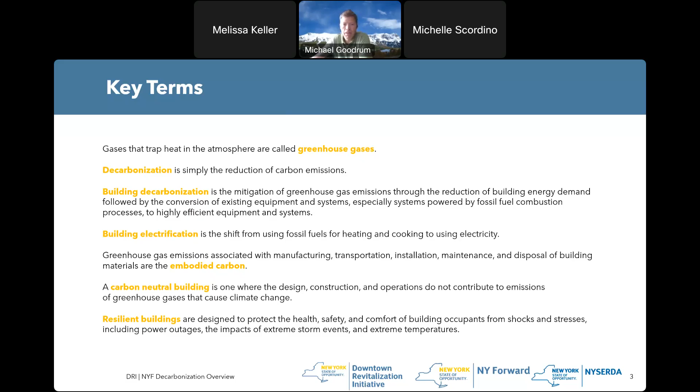As far as New York specifically, New York has the Climate Leadership and Community Protection Act, or the Climate Act, which sets out a goal to reduce carbon emissions by 85% by 2050.

One of the goals is for 70% of the state's electricity to be generated by renewable energy by 2030, which is coming quickly, and then 0% fossil fuel generation by 2040.

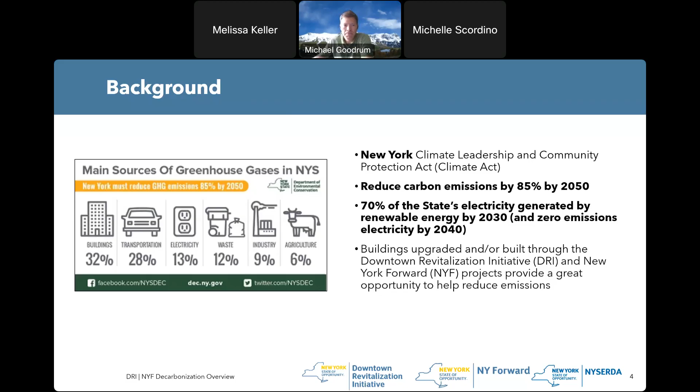When we talk about building decarbonization, one of the benefits many folks consider is the economics - looking at utility cost savings and utility costs. We've outlined two components of utility costs and savings associated with building decarbonization. The first is energy efficiency, where you're improving the efficiency of systems, basically getting the same amount of light, heating, or cooling for less energy.

By reducing the energy use for those things, you end up reducing your associated energy costs because you're using less energy. Building electrification, where you're moving from fossil fuel to electric sources, will reduce or even eliminate fossil fuel utility costs, but it also increases electricity costs, and that may or may not result in savings. A lot depends upon what the utility costs for fossil fuels versus electricity are, and those are changing over time. At any given time you have to evaluate, but just because you implement a building electrification measure doesn't necessarily mean you are going to lower your utility bills. Some of that depends on the associated costs with the different utilities.

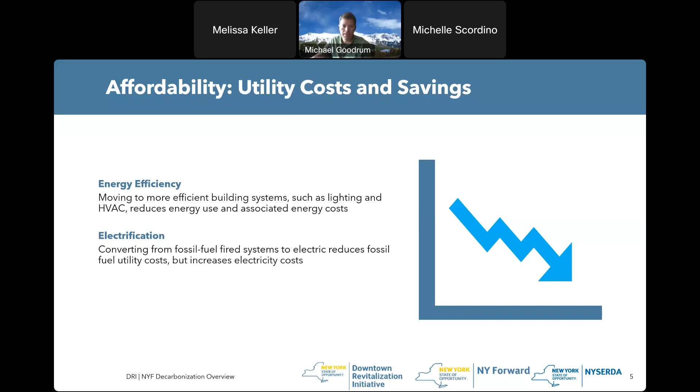Other benefits related to decarbonization, besides potential cost savings, include things like health benefits, with electric systems that don't have emissions from combustion exhausted into the building space. We talked about resiliency before, and strategies we'll talk about today can help your buildings better weather extreme events and remain comfortable and in operation. There are even things like improved comfort for occupants, with increased airflow or movement, or in places that may have only had heating previously, installation of heat pumps can give some cooling capacity for those days where it gets a bit uncomfortable inside. So there's a variety of benefits to building decarbonization as we start to talk about the different strategies here.

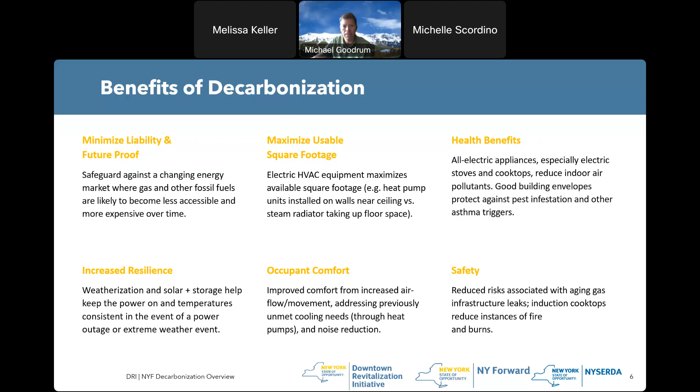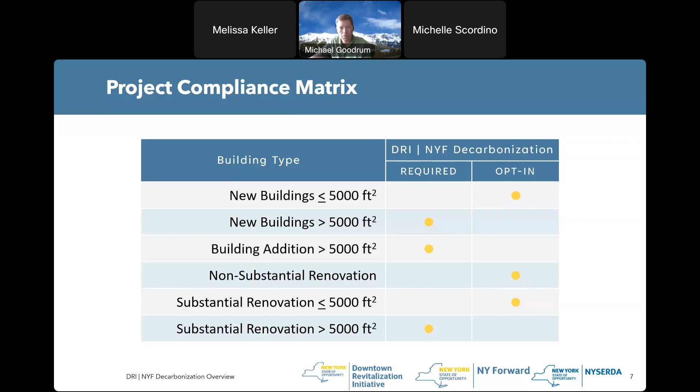If you are required to meet it, we have three compliance paths for decarbonization that projects can select from. The first is complying with the New York Stretch Energy Code, which is about 10% more efficient than the state's base energy code. You can meet that one of two ways: the first being following prescriptive improvements, meaning for the building envelope, it'll specify certain R-values of insulation you need to meet, things like that. Or you can pursue a performance-based path where you demonstrate whole building performance with an energy model, showing your energy use per square foot is below a number specified in the code for your building type.

A second option is an Energy Star path, which makes use of Energy Star's Target Finder software, associated with their Portfolio Manager program. In this case, you would achieve an estimated score of 90 or better. With Target Finder, you enter some basic building information and project out a year's worth of your building's energy use, and it will generate the expected score for you. I know there's been news about the Energy Star program. As far as we know, it still exists, so this is still an available compliance path. If something changes in the future, we'll probably make some adjustments in the program, but for now, it remains a viable option.

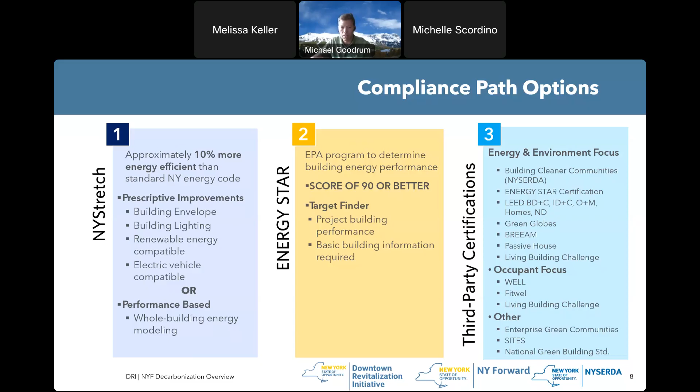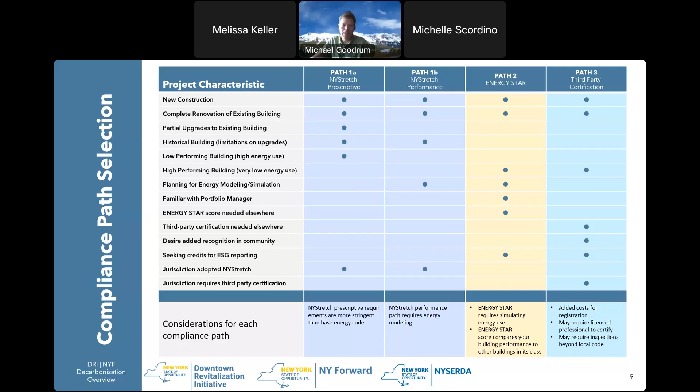If you were planning to do a whole building energy model or something, the New York Stretch Performance Path or Energy Star could be good. And like we said, if you're already thinking of doing, say, LEED, that could be a reason to do the third party. So each of them has pros and cons, but we designed the program so that there's some flexibility for projects to find the path that best suits their project and meets their needs. And now I will turn it over to Michelle, and she will start to walk us through some of the ways we pursue building decarbonization in our projects.

Thanks, Michael. As Michael said, we're discussing decarbonization, especially in the context of DRI New York Forward, with the majority of projects being buildings. So we'll focus primarily on building systems, but we also wanted to mention that transportation is another key component of decarbonization, and there are some projects that touch upon that as well. So we'll look at new buildings, existing buildings, and also mention transportation.

So how do we get to decarbonization is the first focus of this part of the presentation. For new buildings, the main focus is integrating more efficient designs than required by the New York Building Code, incorporating electrification solutions, improving the building envelopes, which we'll discuss in greater detail, and integrating clean energy sources, whether on-site or off-site. For existing buildings, we'll discuss retrofits for existing systems, building envelope upgrades, which may look different than for new buildings, and also clean energy sources.

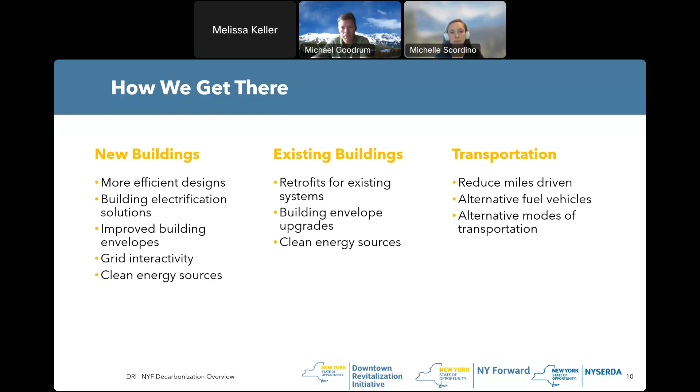So again, focusing on buildings, new buildings versus existing buildings. New buildings start from the conception of a project, integrating decarbonization into all aspects of a design. So integrating passive lighting, heating, and cooling. We can look at electric systems for both heating and cooking appliances as well. Integrating high performance building envelopes, lowering the load of the building, and using more efficient systems than required by the base energy code in New York.

For existing buildings, a big concern is constructability. Given that you've got a structure of a building, you have to think about backfitting into existing systems. Envelope improvements may be more challenging for existing buildings than for new buildings, but you can still achieve pretty high building envelope performance through renovations. Focusing also on minimizing disruption to occupants in occupied or partially occupied buildings. Building contingencies into the construction process, knowing that things come up with an existing building, which may require different workarounds than anticipated at the beginning of a project.

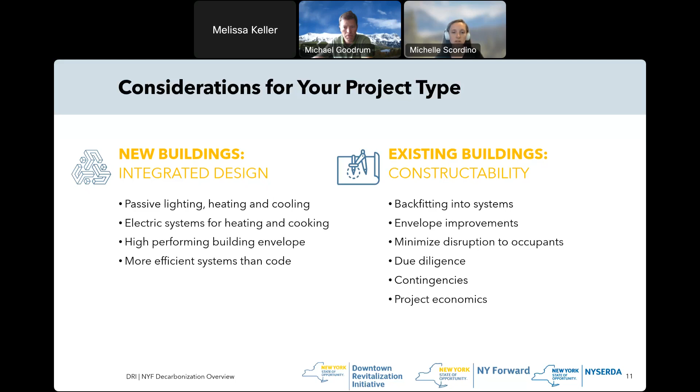Some steps for decarbonizing a building include, first, understanding your current or projected energy consumption. This is very important so that you have a good handle on how an existing building is using energy, or for a new building, how you anticipate it to use energy. Once you have a good understanding of how the building will use or currently uses energy, you can then look at reducing loads and maximizing energy efficiency. And then thirdly, integrating building electrification strategies, either through equipment or

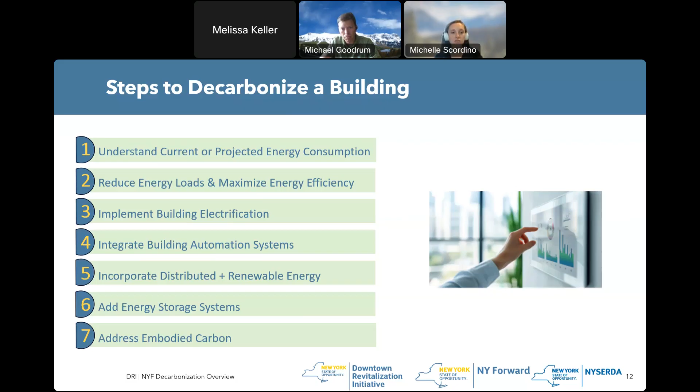other appliances. Fourth, integrating building automation systems to further maximize the efficiency of your building. Fifth, incorporating distributed and renewable energy resources, whether on or off site. Sixth, adding energy storage systems, which also increases the resiliency of the building. And then finally, addressing embodied carbon.

Looking here at some attributes of a decarbonized building. Decarbonized buildings, they maximize energy efficiency. They work, you know, just holistically, kind of understanding your building and how it's using energy. Decarbonized buildings also favor electric end uses over fossil fuel combustion to lower the emissions associated directly with the building itself.

You can also produce or procure your own zero emission electricity. So through solar panels, for example, or also procuring your energy from offsite, such as community solar systems or also community wind turbines. Fourth, also, decarbonized buildings are designed with flexible loads and storage as well that can respond to grid conditions. So for example, if you have a solar system that's also working with a battery system and the power goes out, you have that backup energy to continue meeting all the demands of your building.

Fifth, thinking of resiliency. So again, what I just mentioned is a resilient measure. So if you have your own energy that your building's producing and your building's all electric and you have a battery system, when power goes out, if you've charged that battery, then your building is set. So that's an example of a resilient building. And then finally, designing with attention to embodied carbon, as well as low global warming potential refrigerants as well.

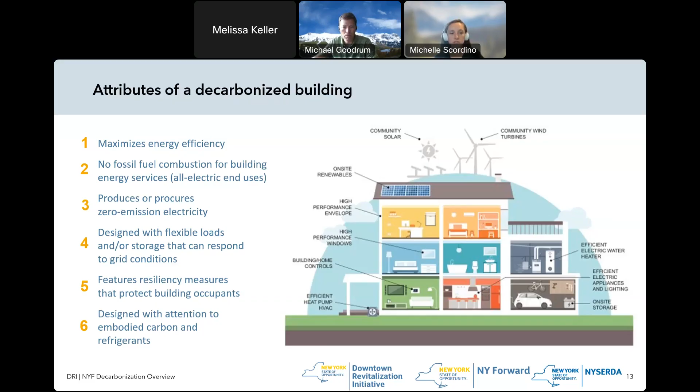So the next section here, we're going to take a deeper dive into some strategies for decarbonization, and we'll hit kind of 4 main categories. The first being load reduction strategy. So we'll go through some high performance building envelopes, LED lighting with occupancy controls, energy recovery ventilation, which can optimize your heating and cooling demand, as well as smart electric appliances.

Next, we'll move to building electrification, which will include making sure that a building has the sufficient electrical capacity and service to meet the building demands. We'll talk through cold climate air and ground source heat pumps for both space heating and cooling, as well as heat pump water heaters with storage tanks and demand flexible controls, electric induction cooktops and heat pump dryers.

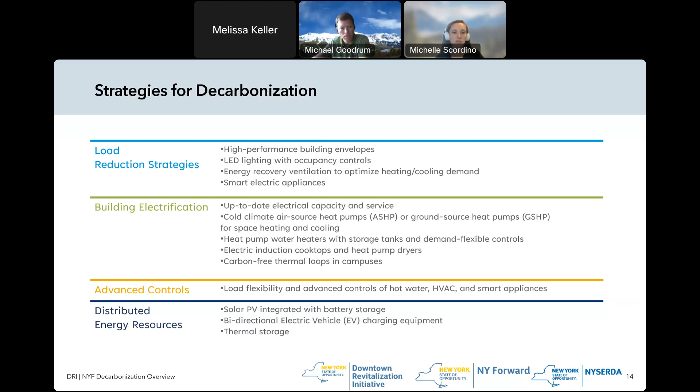And then moving on to advanced controls, we'll also discuss some load flexibility and advanced controls of hot water, HVAC, and other smart appliances. And finally, conclude the section with distributed energy resources such as solar panels, bidirectional EV charging, and thermal storage.

So first here, to kind of define what load reduction means, we're focusing here on 2 building load reduction areas. So electric load, which is the amount of electricity required to operate any electric appliances or HVAC lighting in the building, as well as plug loads, which are things that you plug into outlets. As well as the second kind of load reduction area being heating and cooling load, which is the amount of heating and cooling required to maintain spaces comfortably for occupants and equipment.

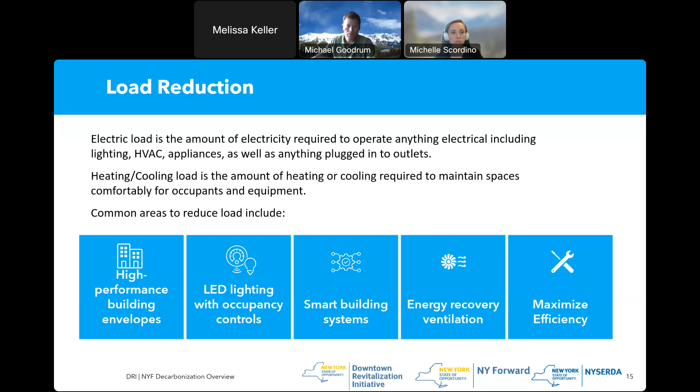So within those kind of 2 areas of load reduction, we'll look at high performance building envelopes, LED lighting with occupancy controls, smart building systems, energy recovery ventilation, and then maximizing efficiency with your systems. So the first area of load reduction, we'll look at high performance building envelopes. Now, I've mentioned building envelope a number of times already.

And so to define that, I just want to say that the building envelope is really any component in your building that's going between conditioned and unconditioned spaces. So typically this is going to be your exterior walls and windows and doors, which would include also the insulation, your framing, the drywall, exterior surfaces of your building as well.

I also want to call attention specifically for New York that in heating dominated climates, high performance building envelopes significantly reduce the energy loads on your building. So there, especially for existing buildings, making envelope upgrades is very important. There's a lot of leaky buildings out there and a lot of wasted energy just because of heat loss in and out of buildings. And so focusing on high performance building envelopes is really key to driving down the loads of your building.

Also, with one of the main paths of decarbonization compliance being the New York Stretch Code, I wanted to note that New York Stretch does require improved efficiencies compared to the base energy code for building envelope performance factors. For example, the windows and insulation as well as thermal bridging are more stringent in the New York Stretch Code than is required by the base energy code.

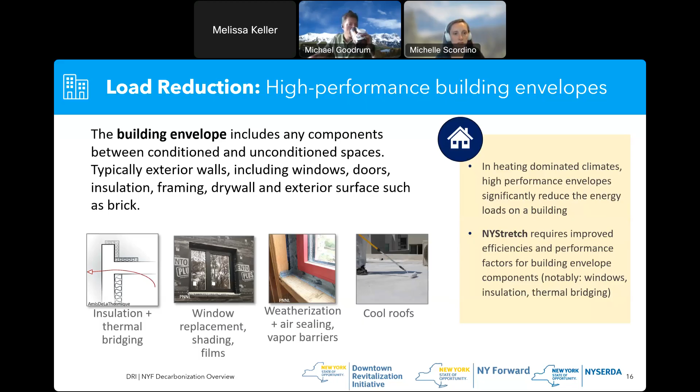The next load reduction strategy is LED lighting with occupancy controls. So lighting is something obviously all buildings need, and LED fixtures have made driving down lighting loads much more possible than in the past. But then also pairing LED fixtures with occupancy sensors to turn lights off and on, either from sensor controls or through timers, can really drive down the lighting loads on your building. In addition, using natural lighting such as skylights and strategically placing windows to bring in more natural light can also bring down some of your lighting loads in a building.

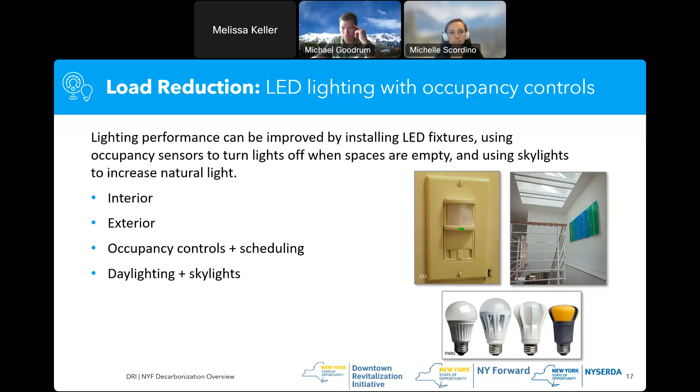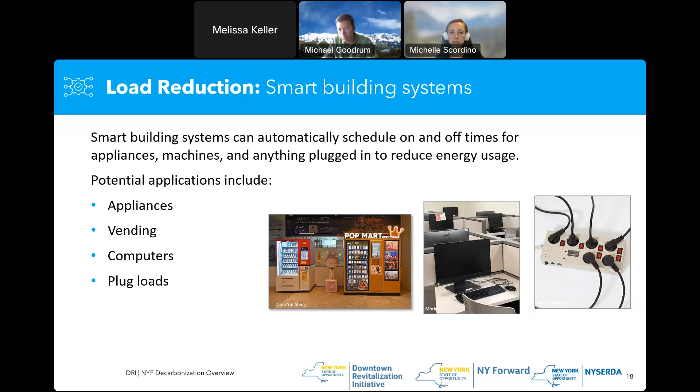The next one, ventilation strategy. So we have two ventilation strategies we'll be discussing here. The first one is ventilation air, so the amount of air that you're bringing in and out of the building. By reducing the amount of air that you're bringing in to what is actually necessary for the building, you can really limit what your HVAC equipment has to condition.

So some strategies for this can be using natural ventilation, demand control ventilation, which is based on sensors determining how much is actually needed in the building, and then also using circulating fans, which move around the air so the air in a building isn't stagnant, but it's not necessarily bringing in external air at all times. And then additionally, reducing losses through the ductwork of your ventilation. So insulating ductwork and piping, and also air sealing ductwork makes a big difference in regards to energy loss for ventilation air.

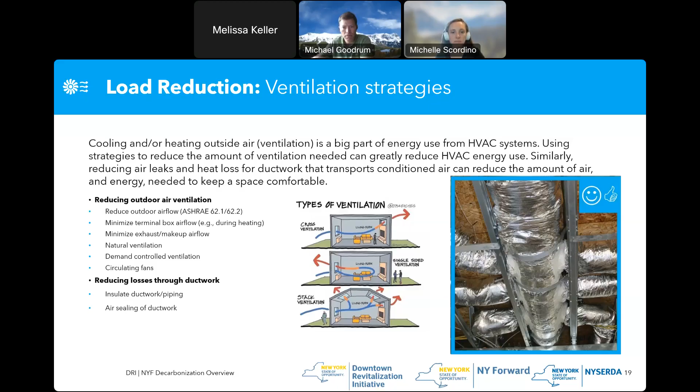And I believe we've got this one and one more. So the next, also regarding ventilation, is using energy recovery ventilation. Energy recovery ventilators are an added piece to your HVAC equipment where a heat exchanger preconditions your incoming outdoor air with the exhaust air from your building. So in a heating season, your hot air is going out as you're bringing cold air in, those two air streams pass, and you're able to preheat that air coming into your building so that your HVAC equipment itself doesn't have to do as much to get your supply air temperature to the required temperature for distributing to the building for heating.

This can be, as I said, integrated in your ducted HVAC system, as well as you can incorporate various configurations, such as in your domestic hot water systems, using hot water to also preheat your incoming air, for example. Yeah, particularly important for New York Stretch.

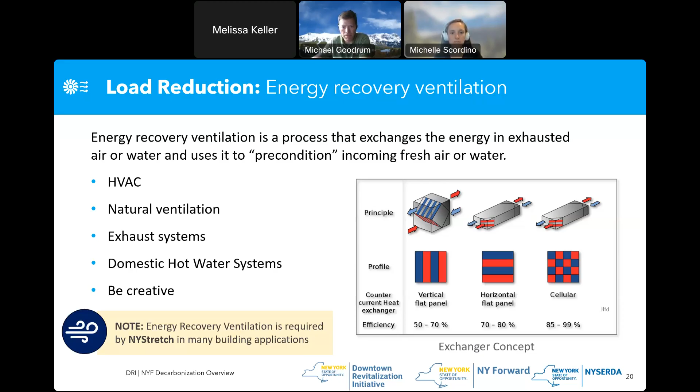Oh, okay. Just wanted to note that energy recovery ventilation is required by New York Stretch in many of the building applications. So not all, but something I want to particularly bring to your attention as your projects are designing their HVAC systems. And then you can move to the next one.

In addition to ventilation loads, we've also got domestic hot water load reductions. Domestic hot water can be directly reduced through lowering supply temperatures, or indirectly by reducing the losses and loads of the equipment. So we recommend lowering domestic hot water supply temperatures for systems that might be exceeding what is actually necessary for distribution. So aiming at the lower end of what's required, which is typically 120 to 130, and using the lower end of 120.

Also using high efficiency faucets and shower heads to limit the amount of water that's just going down the drain, as well as domestic hot water heat recovery. So similar to energy recovery ventilation, you can also use heat recovery for your drain water. As your hot drain water is going out, you can precondition your cold incoming water through the heat from what's outgoing. And then similarly to ventilation, reducing losses in your piping through insulating your water heater tanks, as well as the domestic hot water piping.

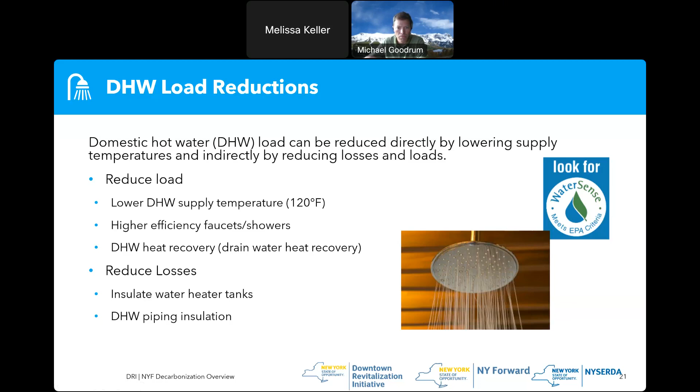I think we lost Michelle.

So I'll pick up the last piece here in the load reductions, looking at maximizing efficiency, especially of your HVAC systems, which are two different forms of commissioning strategies.

There's retro commissioning and recommissioning. Retro commissioning is when you had a system that was installed but never commissioned. The commissioning process involves going through and testing it all, making sure it's operating the way it was designed to—things turning on or off, or adjusting to certain levels, when they're supposed to. If that's never been done, your building may not be operating as efficiently as it can. By doing a retro commissioning process, you can take the systems and make sure they are working the way they were originally designed, which can bring a lot of efficiency improvements.

The other is recommissioning, which is for a system that was once commissioned, but maybe it's been 10 or 15 years and nobody has been paying as close attention to it since, so it's not operating as well as it had been when it was new. You can go through and essentially repeat the commissioning process, restoring things to working the way they were designed and improving the efficiency of the systems that way.

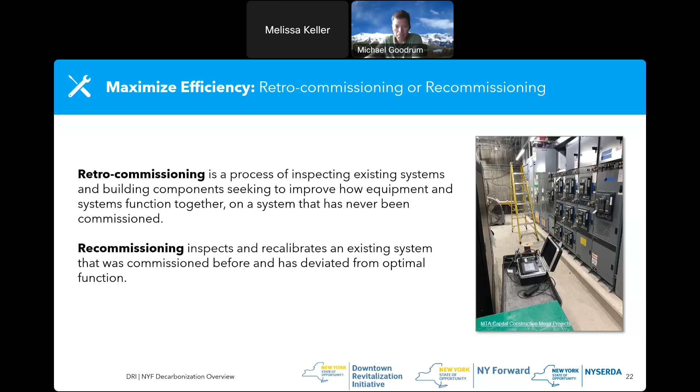After load reductions, the next step, as you saw in the slide Michelle covered, is moving into building electrification. We defined that before as moving away from fossil fuel fired systems to electric powered systems, especially for heating and cooling. We'll start by talking about electrical capacity, which isn't really a specific strategy for heating and cooling, but is an important foundation for the other strategies. Then we'll look at heat pumps for space heating and cooling, as well as water heating, and last, electric appliances.

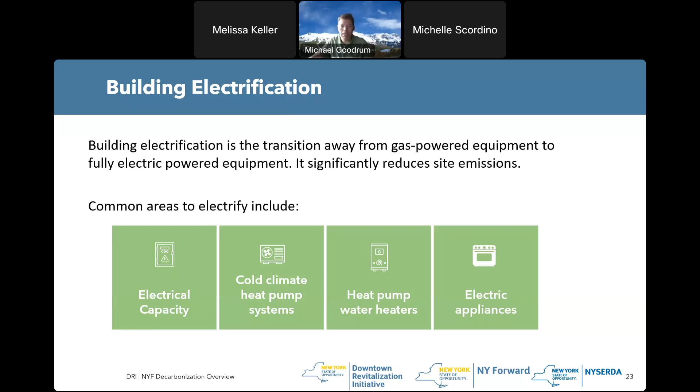So before talking about electrification, an important piece of it is electrical capacity. This is primarily a concern for existing buildings where you're doing a renovation—obviously in new construction you can build for the capacity you need. But for older buildings, especially something like a historical building, their old electrical infrastructure was designed before a lot of the electric loads we have now, even down to things like computers and television screens everywhere.

So the capacity may not be sufficient for switching from, say, a fossil fuel fired HVAC system to an electric heat pump based system. Going through and getting your building to what we might call electric ready—noted here, there's no savings from this. We talked about utility cost savings before, but getting to an electric ready standpoint, unfortunately, is just a cost. It's not necessarily going to save you any energy, but it will set you up to implement some of these other strategies.

That can include doing an electric demand analysis—basically looking at all your electric loads, how much they use, and how that compares with your capacity—and then, if you need to, pursuing a utility service upgrade. We're talking about this now at the front because if you do need a utility service upgrade, that can be a pretty lengthy process, so you'd want to get started on that study now, making sure you have the capacity or pursuing other upgrades so they don't slow you down from implementing other strategies.

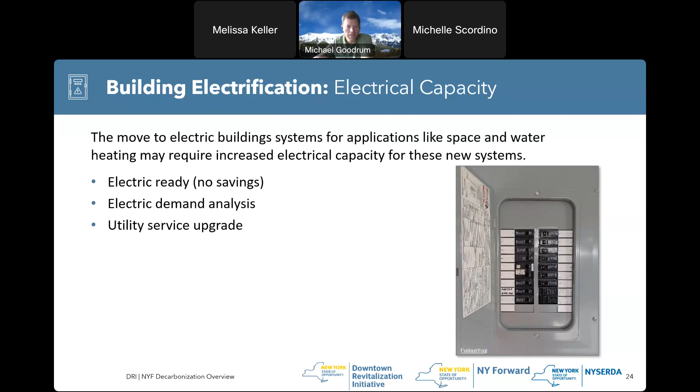If you're looking at replacing that with something like an air to water heat pump, or a heat pump based system, most heat pump based systems produce hot water at a lower temperature—a lot of them are in the 120 to 130 Fahrenheit range.

Which would be considerably less than, like the 180 of an existing system. So making sure that you can still heat the building properly if you're going to make that switch. Some strategies for making it work can include making adjustments to the system so it can operate at lower temperatures.

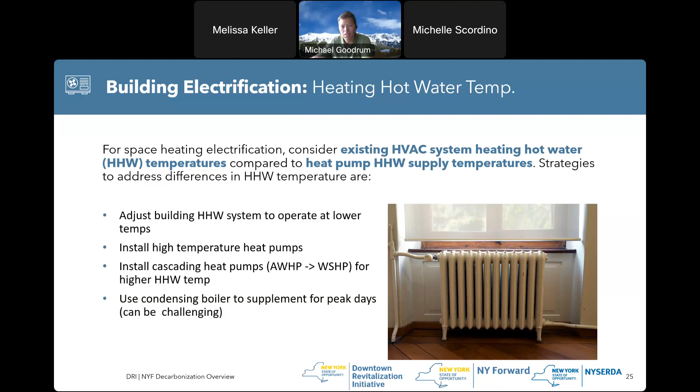So addressing the hot water temperature of the system is another key piece. Once you've looked at electrical capacity and the hot water temperature capacity for your system, then you can move into the heat pump technologies for electrification.

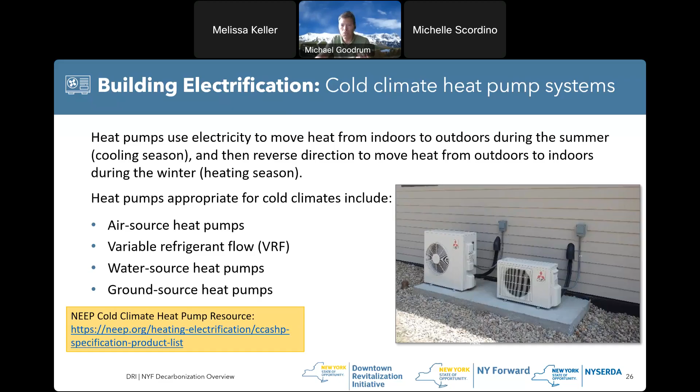If you think about the air conditioning unit with the fan outside that's running, you basically have something like that running here with the heat pump. So you've got some noise when it's running. The other thing is that they need a lot more room for ventilation. So either you need a bigger space for the water heater to be in, or you need some form of ventilation, whether it's piping to the outside or vents cut in the room or something like that. Each manufacturer kind of has its own specifications for that, but those are two things to think about.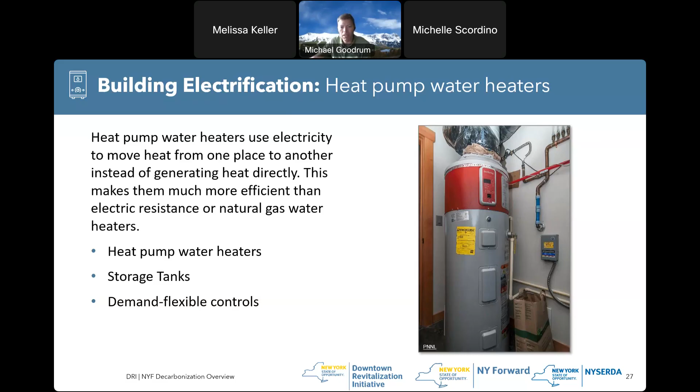The last item is electric appliances. These are probably most common in multifamily or residential type settings, things like induction cooktops. I know there are electric resistance cooktops, the old ones with the coils - anyone that's ever used them knows they're not awesome.

Induction cooktops are way better and also way more efficient, so they can be a good option. And they do also make heat pump dryers. It's similar to the other heat pump technology in the way it works, and they're a very efficient and low operational cost form of clothes drying.

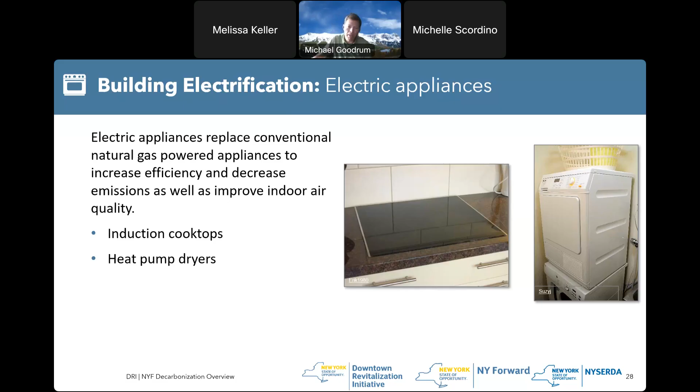After the electrification strategies, then we're looking at advanced controls, and really layering these in to help make sure that things are running optimally. That can include monitoring-based commissioning, and then load flexibility and grid interactive controls.

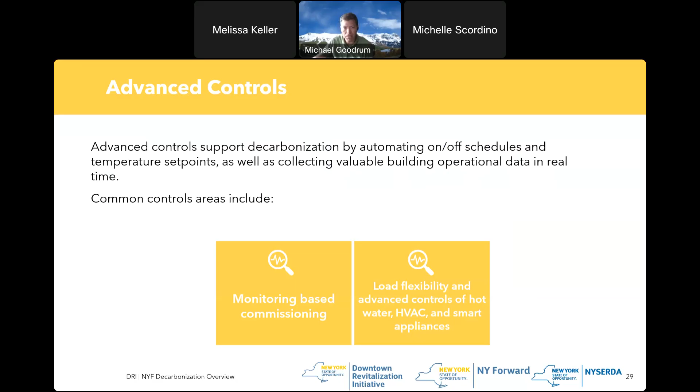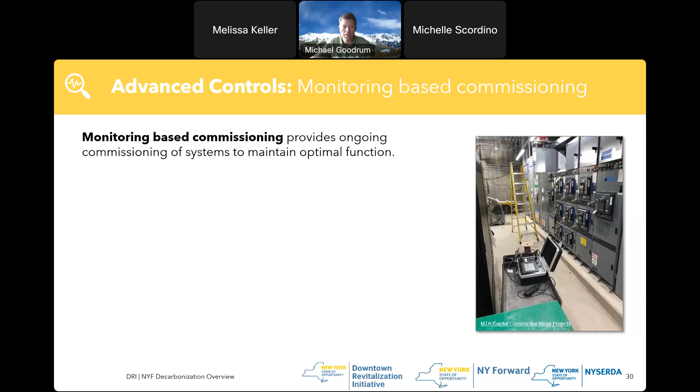Monitoring-based commissioning - we talked about the other commissionings before. This is just an ongoing commissioning, so you're basically doing a regular tune-up of your building systems over the life of the building to make sure it keeps working the way it's supposed to, instead of having to do a tune-up every 10 years. And then load flexibility or other advanced controls let you program energy saving strategies into them.

So like scheduling and optimizing when systems turn on and off to heat or cool, or resetting temperatures - so when people aren't in the building in the summertime, it doesn't need to be 70. Maybe you can let it be 80 degrees and then cool it back down in the morning. Or same with pressure, that can affect how much fan energy you're using. And so adjusting those things helps minimize the energy use of the system.

Michelle talked earlier about some of the ventilation strategies, and you can use CO or CO2 sensors to control how much ventilation you need. So things like a gym that doesn't always have people in it - you don't need to bring in a whole bunch of outside air if there's nobody there.

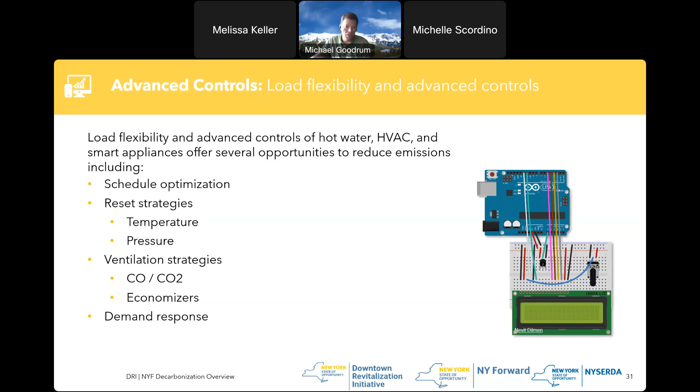And then demand response, the last one - sort of what we talked about with the water heater, where you can make adjustments for times when energy costs might be higher. Say setting the temperature to 72 instead of 70 at times when energy costs are higher, so you run your system a little bit less than you would have otherwise. Those can help layer on some additional efficiency and optimize your systems.

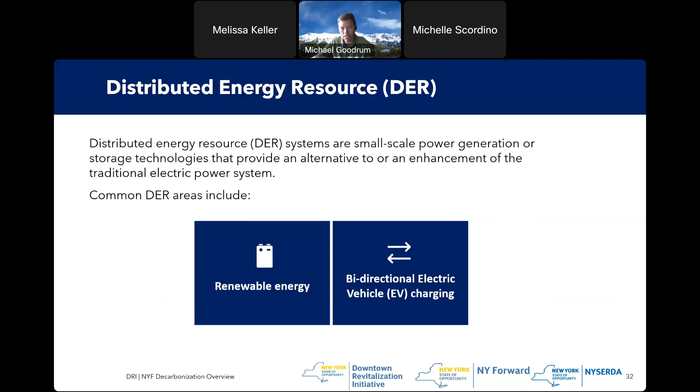And then the last are distributed energy resources. The main thing we'll talk about is renewable energy, and we'll look at some EV charging. But I think most people are familiar with solar PV arrays in particular, and they're probably the easiest for most buildings. Most have enough space to incorporate some solar panels, producing some electricity on site with clean power that has no greenhouse gas emissions when it's generating electricity.

You can also do wind - that's probably less common for most buildings. The trick here is that you may have sun at times when you don't need to use as much electricity, and you may need electricity when you don't have sun. That's where some of the battery storage can come in. We're not diving into that too deep here, partially because it can be expensive and challenging for a lot of buildings to implement. But storage definitely expands your flexibility with these systems and the resiliency for your building.

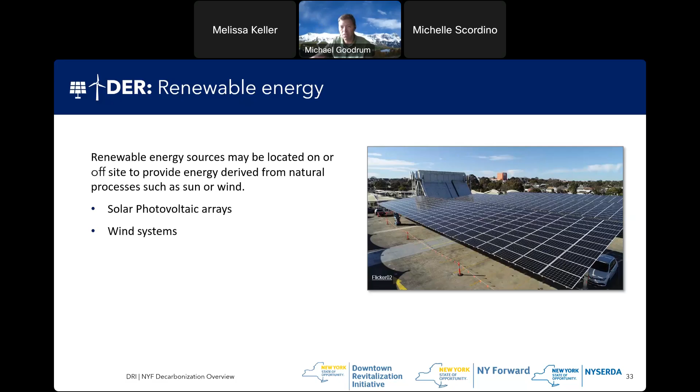A unique form of battery storage that we'll talk about here briefly is bidirectional EV charging. Basically, electric vehicles have become pretty common and are in most places, and really you can think of them as like a mobile battery.

So if you have a situation where you have a fleet of vehicles that is regularly at a building for an extended period of time, say a small office, you could take advantage of them as a battery if you have a PV system. If you're producing a lot of electricity in the afternoon when it's sunny, and everyone drives into work in the morning, you can draw power from the batteries of the cars in the morning to help meet some of the building energy needs. Then in the afternoon, when you have more solar power than you can use, you can recharge the cars so they're ready at the end of the day.

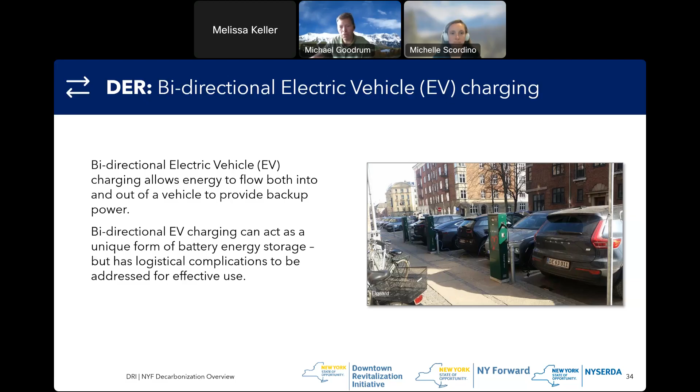That's a rather quick overview of a lot of different strategies. We're getting down to a few minutes left and have a couple of slides. I think Michelle is back, and she will help take us through the last couple of frequently asked questions people have had in the program related to decarbonization. Thanks, Michael.

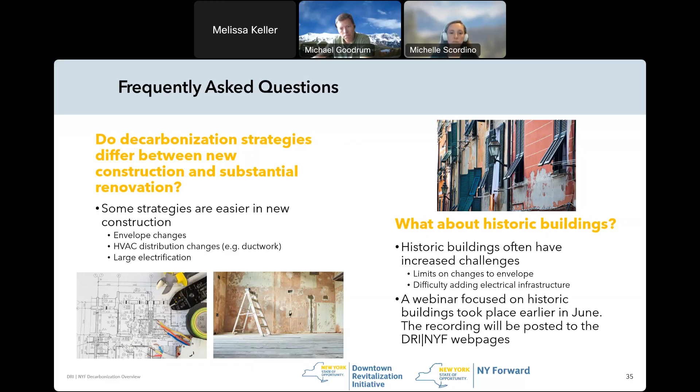The last couple of questions: do projects need to be all electric for DRI and New York Forward? And the answer is no. While it's encouraged, it is not required.

And finally, we've gotten the concern of electricity outages and how you deal with that if you're moving to all electric, especially heating and cooling systems, and also hot water. So again, stressing high performance building envelopes that limit what is actually required by your building, which can maintain the building temperature for longer periods of time - that's a resiliency measure. Also, installing solar PV systems can provide electricity for systems when the grid is out, and pairing that with battery storage systems can make that energy available if the grid is unreliable. Finally, dual fuel systems can help prevent issues if your systems are mainly electric. Having a natural gas backup, say for your heat pump system, can also help fight against difficulties with electricity outages.